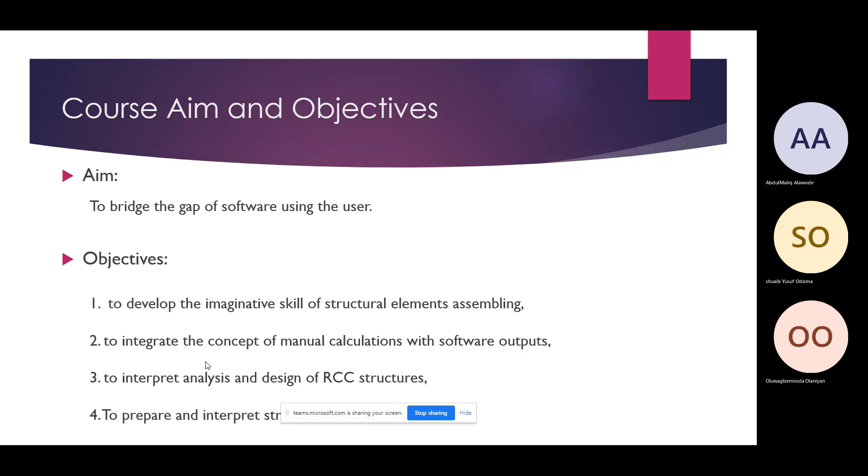So at the tail end of this program, we are going to do slab detail, beam detail, column detail, and if time permits - I'm not sure because of the time we have, we might not be able to touch that aspect - so we are going to treat probably foundation, any of the foundation, be it pad, raft, pile, or pile cap, anyone. It depends on how the thing goes.

So that is the overview of the course. Let's just go through basic things that we all know. What are the requirements when we say we want to do structural design? What are the things that are required? Okay, we check a structural design - how do you know, how do you certify that this structural design is right?

The first thing that you have to consider is the safety. Is this design safe? If you are living there, are you safe? Is your life safe? There is this adage that says safety first is a site slogan - it's known everywhere, safety first. In anything you are doing as per engineering, safety is the first thing.

Then the next thing is serviceability. Okay, this building we are designing to resist, let's say, a retaining wall that is retaining a head - if you put the soil at the back of the wall, is it going to tumble? Is the wall rigid enough, does it have enough resisting overturning moment to overcome the overturning moment being imposed by the head? Is it going to serve the purpose at which it's being designed for? That is the next thing we should consider.

Okay, we have designed this building to be for a cinema. If 100 people should come in, can this building resist the weight of 100 people? So that is what serviceability is talking about.

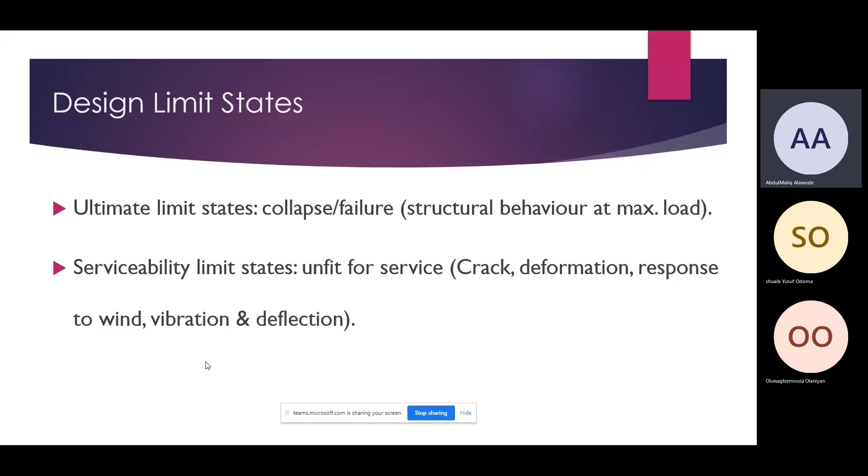These are some of the things that come to play at the serviceability limit state. So at that state, the building is showing failure, but the failure is not total. The building is still existing, but it's already showing that there are some imperfections in certain aspects of the design.

Now let's move on. We have basically three types of load: the dead load, the live load, and the accidental load. We all know all these types of loads. The dead load is the permanent load, the finishing, the block wall, the partition load - all these things are what we regard as our dead load. The fitting, the earth, and the settlement - all these are aspects. The settlement, as if you are designing the foundation, that's where that comes into play. So that is dead load.

Then the live load - we have the temporary load. Those are temporary loads, like human load, like all these building accessories like chair, like bed, like other amenities. Also we have the wind, the snow, the temperature, and the imposed load. All this comes under the subset of live load.

Then we have the accidental load. These accidental loads are short loads, but when they occur, they tend to be significant. Like people that work in the oil and gas industry - there is a tendency of having fire outbreak. A designer should consider fire load when designing a structure that is, okay, oil and gas. Fire accidental load should be considered in that kind of aspect.

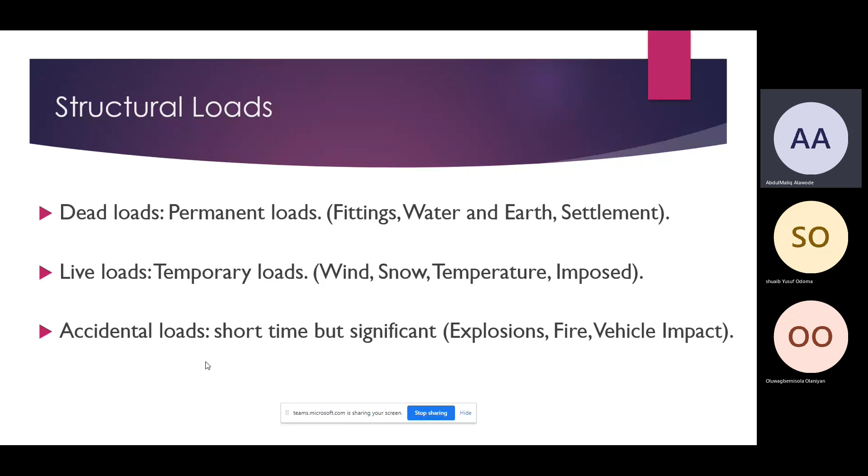Then we have the load combination. When you want to take your ultimate limit state, the ultimate load - that's the ultimate limit state level. Those are the factors of safety you consider when you have your structure exposed to dead and imposed load alone. Use 1.4 and 1.6.

Now, mind you, all these conditions that I've been saying are according to BS code. According to Euro code, it differs - there is a little bit of adjustment in Euro code compared to the BS code. Although both are recognized, the world is tending towards Euro code now, and probably we might review it. But as for this course, we are going to be using BS code because that is what is mostly used - that is still being used in Nigeria currently.

Although there are some companies that are switching into Euro Code currently. But if you go to Europe, to other advanced countries to be precise, they have neglected - some of them have neglected the BS Code to a certain extent in certain areas. They are now using Euro Code.

So in Euro Code, if you have dead load and imposed load, like this 1.4 - in Euro Code it's not 1.4, it's 1.35. For imposed load, in BS Code it's 1.6, but in Euro Code it's 1.5. Euro Code is like an optimized BS code. Let me just say that - an optimized BS code. Some people will say if you tell them okay, I use BS code, they'll say it's not economical.

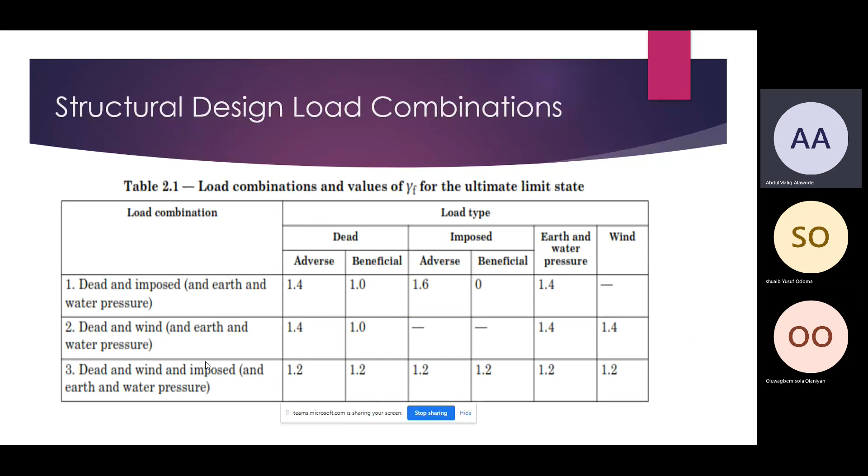As for the loading of buildings, there is a code on that, BS code 6399, if I'm not mistaken. It talks about both dead load and imposed load. In fact, there's another subsection of that code that talks about wind load, how you design wind load for structures that are subjected to it. But because we will be treating a residential building, and that is what is most common, let me stand to be corrected.

Residential, we all know the imposed load is 1.5 if you're considering it as a uniformly distributed load, but as a concentrated load it's 1.4. So you can easily go through that code, BS 6399. It has 3 subsections: one is on load, the second is on wind, and I think the third is on roof and snow loads. That doesn't really apply to Nigeria because I don't think Nigeria has experienced snow or something like that before.

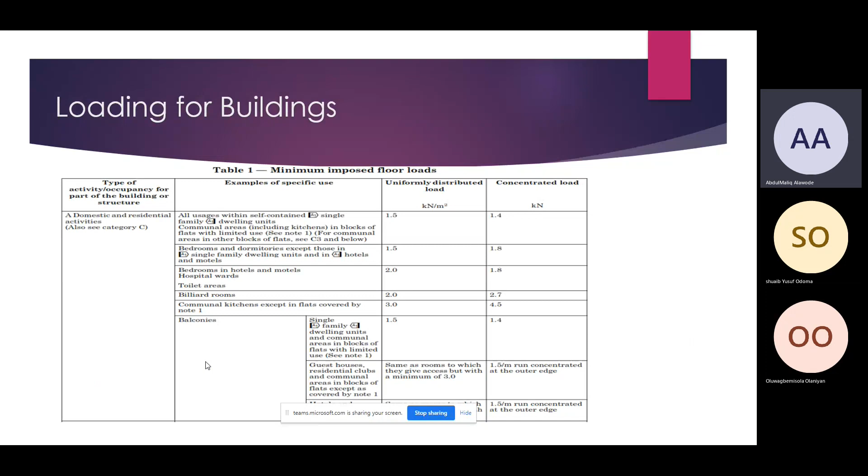I don't know. Okay, design working life. If you design a structure, what's the expected life duration? As I've talked about earlier regarding durability of structure, this building's purpose is residential. How long is it expected to last as constructed without any deformation whatsoever, be it crack or little deflection, without seeing anything?

So a normal building should have a lifespan of 50 years. I think in Lagos now, we are even having buildings less than a year old whose lifespan is already less than a year. Even during construction, we have buildings that are collapsing. So a normal, well-designed and constructed building should last for 50 years.

While monumental buildings, bridges, and other special engineering structures should have a minimum lifespan of 100 years. Bridges, overhead bridges, all these buildings that are subjected to heavy loads should have a minimum working life of 100 years.

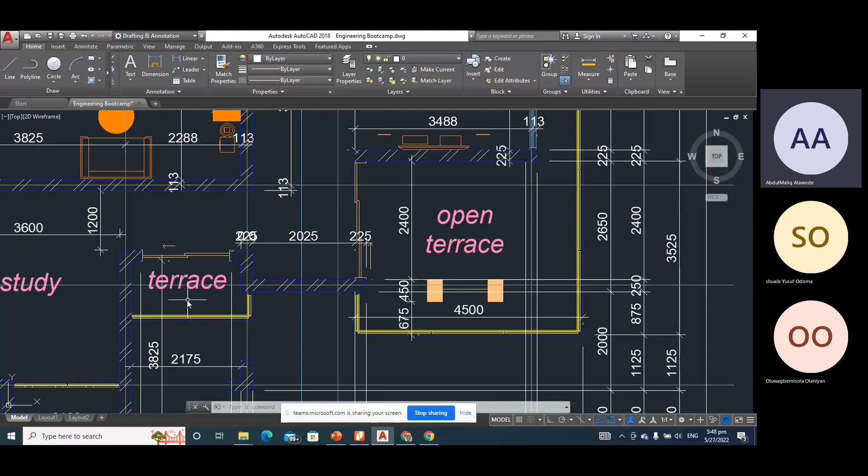Then we have the master bed that has the wardrobe with jacuzzi or whatever they want to put here. Then we have the WC. Then we have the shower. Then we have a study room here. The study room has a terrace very close to it. Then we have another open terrace beside the family lounge. Then we have our staircase that is moving around and a void.

Okay, so we have really studied this building. So majorly the living area, the resting area, they are all on the upper floor, while the amenities area, maybe the cooking, the washing, everything, they have secluded all of them to be on the ground floor. So we have noted that, we've studied that.

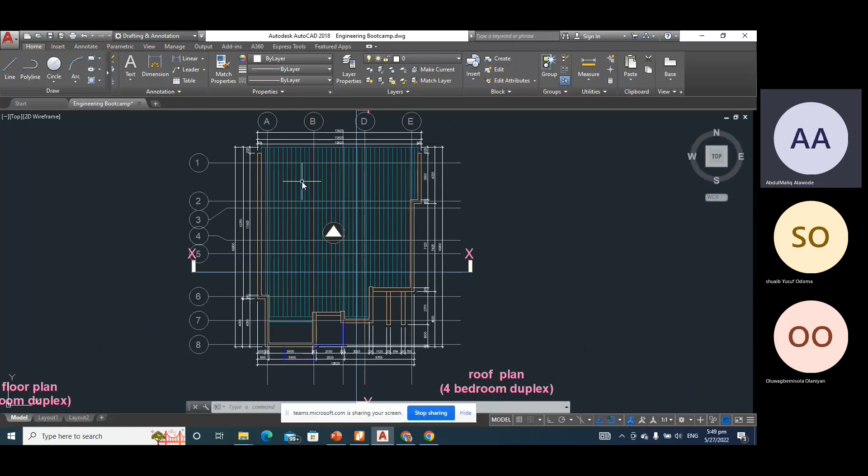Then from this roof plan, you can see that the roof has only one side drain. It's only draining to one side. So that means if you study this roof plan very well, this area has to be higher than this place. This front area has to be higher than this back area.

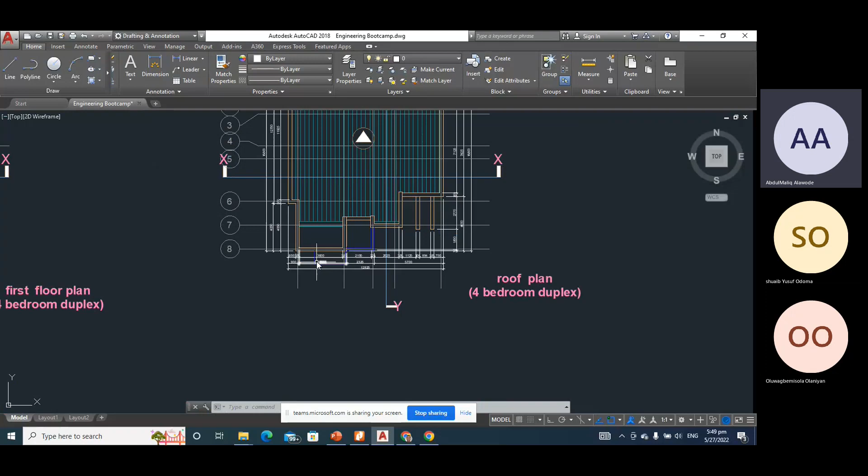What I mean by that is, when they are constructing, before they do their roofing, this area has to probably block, but by the time we check our section, we are going to see that it has to be higher than what we have at the back. Then we check our section to see which section is this. This is section XX. Section XX cuts across this. It goes through the main lounge to the private lounge, and it goes through the window here.

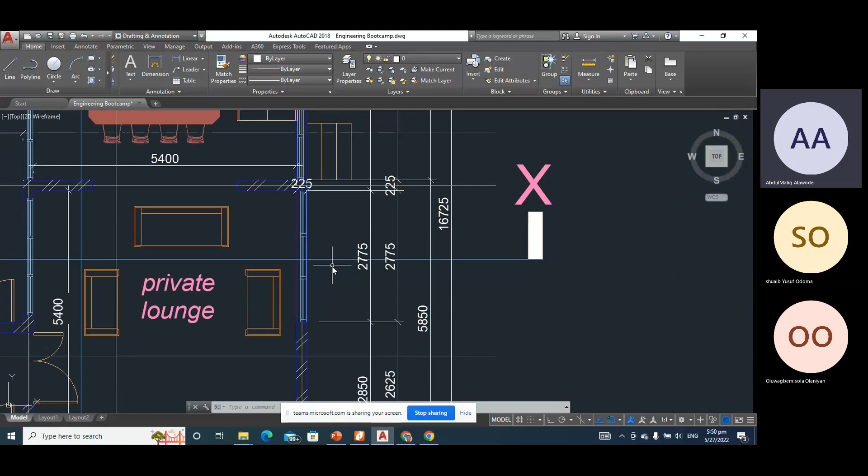So let's see, is that really true on the section? Okay. This is the difference in level I discussed earlier. You can see the building level is higher than the compound level. Then it goes through this first wall, and it goes through another door. Is it a door? Yes, a door, probably a sliding door. Okay, this is a door here.

Then it cuts through, what do we have at this end? This is a window. Okay, is this true? Yeah, it's not close to being true, because it depends. If they like, they can do their window all the way down.

So this is where you now check your window schedule. Okay, what's the name of this window? What's the size? Does it really correspond with what I have in the section? So these are some of the things you have to query the architects on before you start your work.

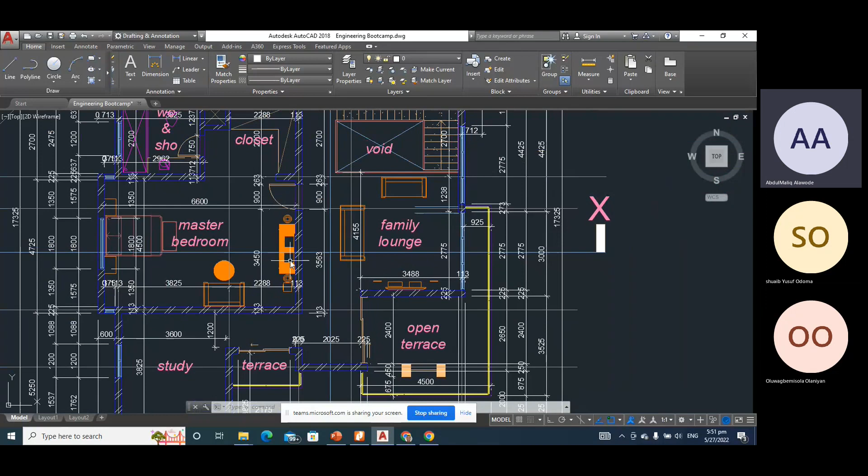So also on the upper floor, what does it cut? It cuts a window that is the master bedroom window. Then it goes to another wall. Then it goes through the family lounge. Then it passes through the open terrace. Is that what we have here? Yes, I think it's almost true. We have window, then wall, then the family lounge, then our terrace here. Okay, that's fine. Then we check the next section, which is YY.

Okay, it goes through window, bedroom, dining. So what I'm trying to say in essence is you check one by one, because these details are very important. If the floors are not working together, you are going to have issues when you start your general arrangement, because the first thing you are going to do as per your general arrangement is superimpose the building.

And when you superimpose, it's like you are bringing the building into reality, because that's what you're going to have in reality. The first floor is going to be on your ground floor, then your roof will be on your first floor. You understand? So that's where the imaginative skill that I mentioned in the objective is going to come from. Because you are going to imagine, okay, the ground floor is here.

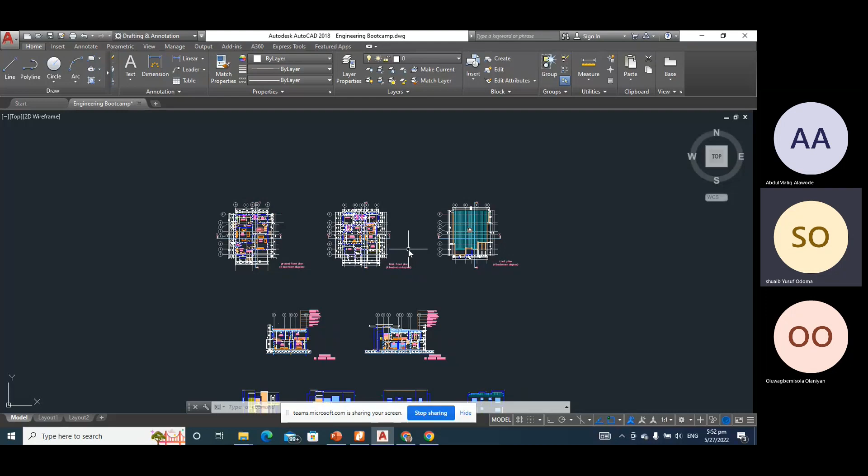How is my first floor going to sit on it? So that is that. Then the second aspect is this section here. You can see what I explained the other time, that the roof is one-side drained. It's draining to the back, and the front is higher than the lower part.

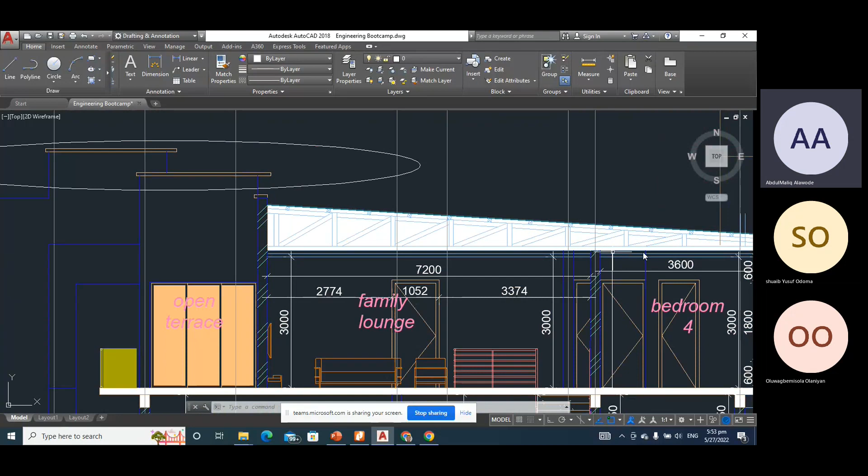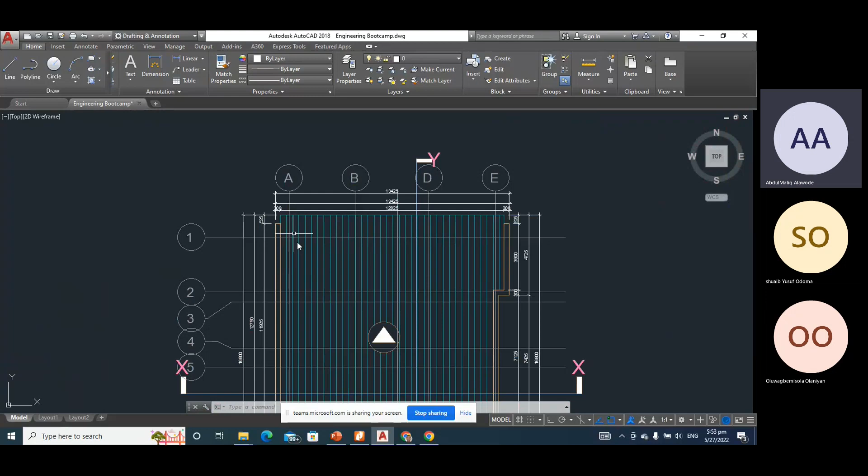In some cases, you might even have the whole roof enclosed. That's what is even trending now. You have your roof totally closed, like you have a wall around it. It has implications, and when we get there, I will explain. Because you can't just leave it, assuming you have a very long roof. You can't just allow your mason to prepare a 7 meters wall without anything serving as lateral support to it. You understand? It's going to give off.

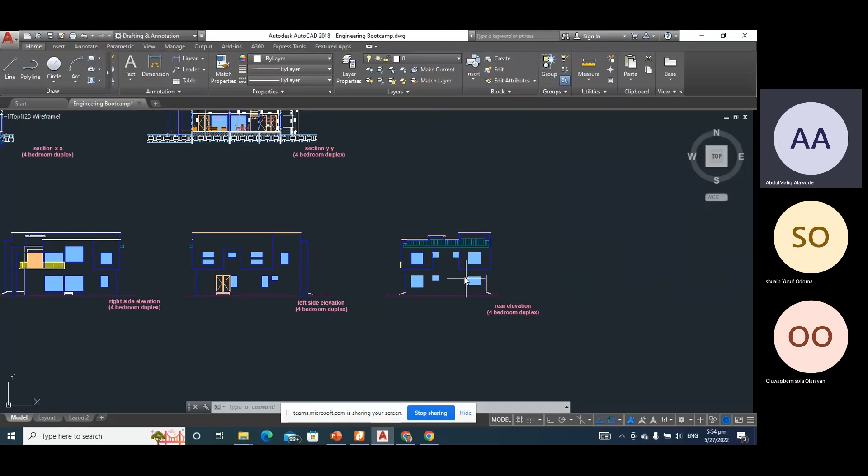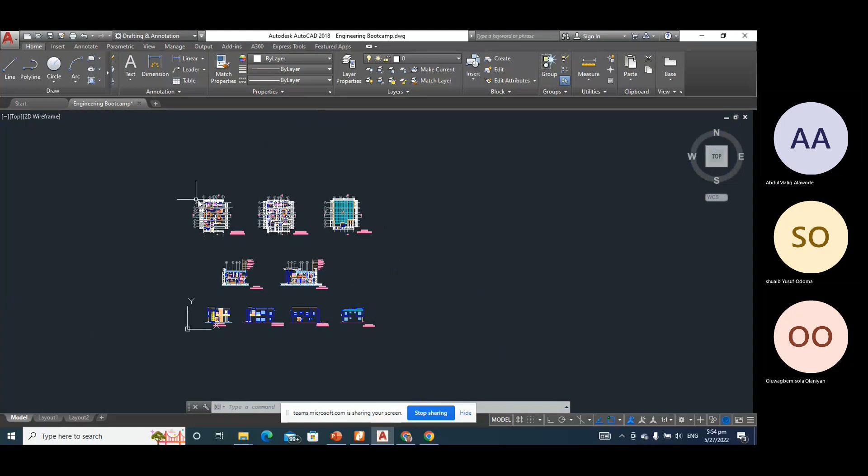Then the next thing is you try and take off the features that are not really interesting as far as structural design is concerned, like the washing basin, this shower, this dining table, this chair, this TV, whatever. They are none of our business. I don't always like deleting files. So what I'll do is copy them to another place so I can work on them and have this as backup in case I want to check any other thing.

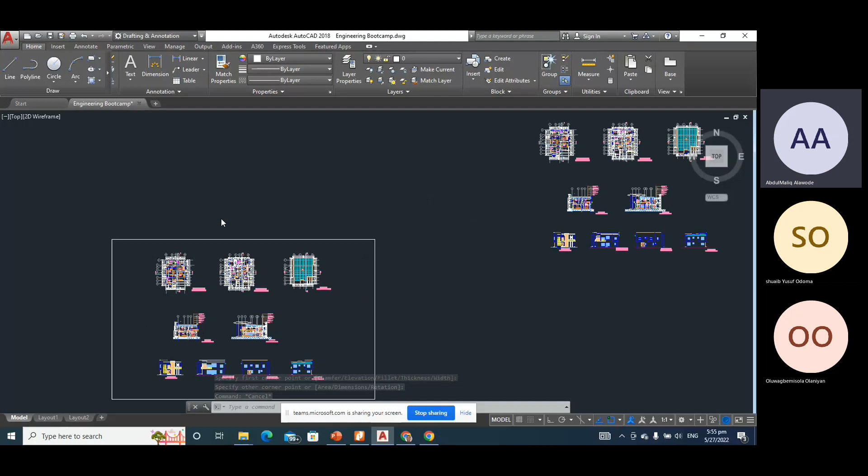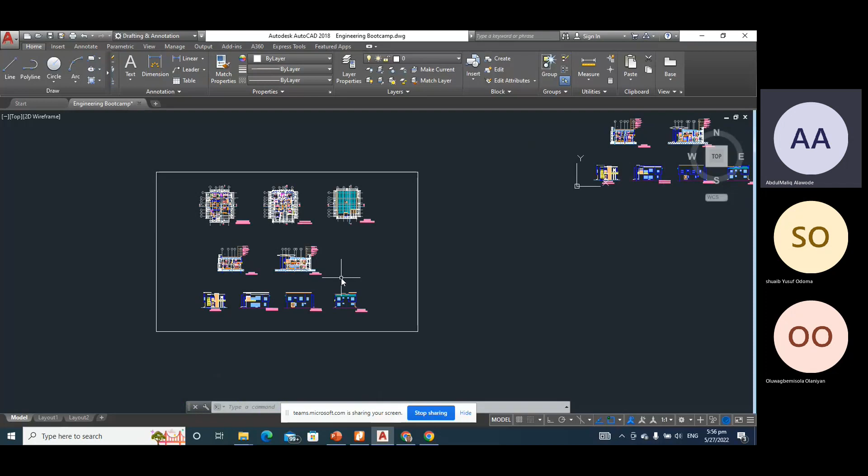Okay, you said you use AutoCAD, right? Yeah, I do. Okay, thank God. What I will do is after the training today, I will send you your own project file. You have your own full architectural drawing, as I have mine. So we are going to replicate whatever we have done today on your own project. You understand? As time goes on, we are going to be doing it like that. So if you have any question, you can always come in because it should be interactive. Do you get the point? Yeah, I do. Okay, thank you.

Okay, now I will isolate this structure. I've taken off that. Then all the features that I don't like, I will take them off: select similar, and delete them. All this kitchen, if the architect has done the right thing, should be on the same layer. I take them off. This one too, I take them off. This, I select similar, take them off. After checking the grid by mere visualizing, you clean up your drawing. What I'm doing now is cleaning up the drawing. All those amenities, features that are not really important, take them off.

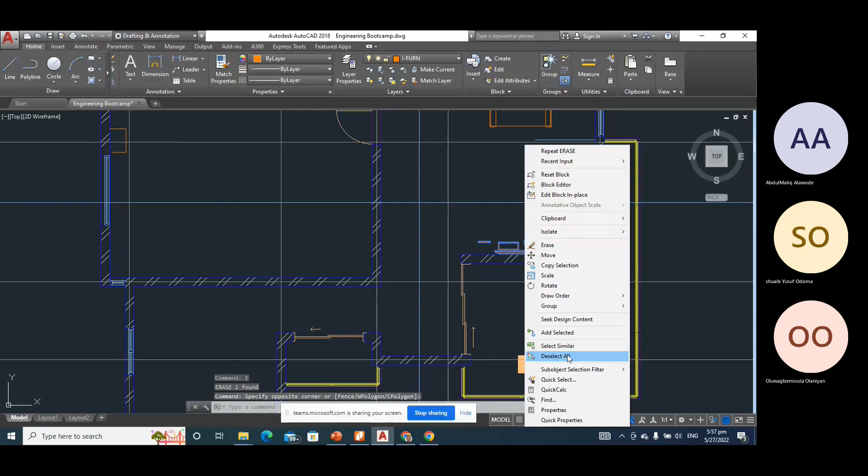Okay. So I think we don't must clean everything, but at least we should have it in the drawing. Select similar, select similar. Okay. To a certain extent, I've cleaned up my drawing now. So we have just wall and door.

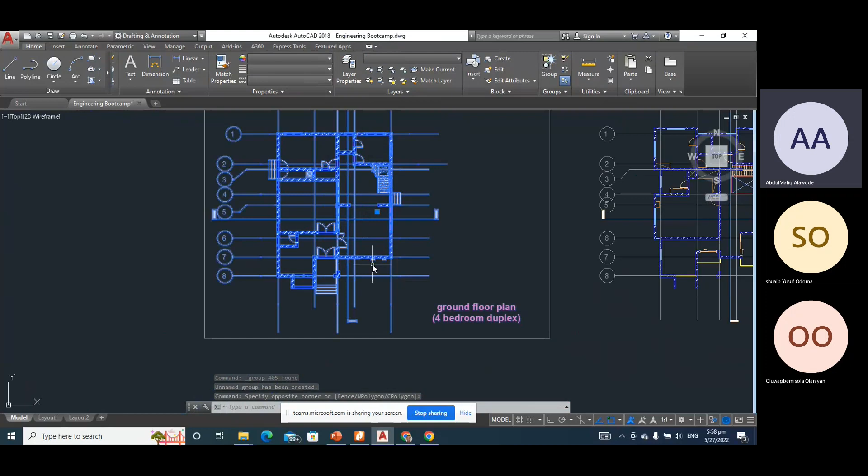Fine. Okay. What I do is this. I'll highlight my ground floor. Then I'll group them. By grouping, that means I've made it a whole. If I select my ground floor, it's going to take the whole features as a single entity. Then I change the color to something like green. If you like, you can change it to blue or any color of your choice. Then I do the same to my first floor too. I group it.

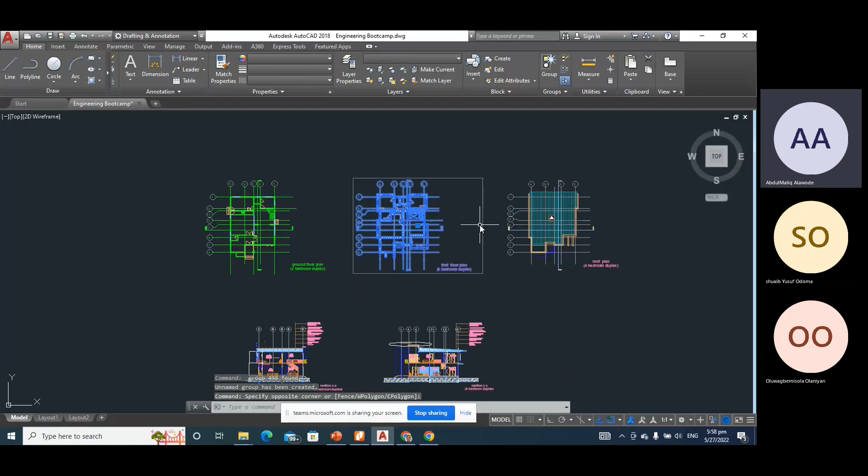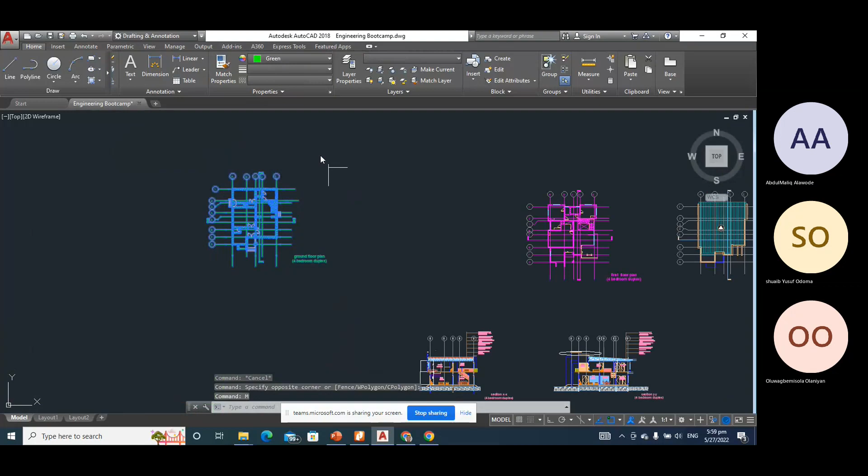Some people prefer to use block, but if you block your drawing, it reduces the working speed of your software. That's why I prefer to group than to block my drawing. So I've grouped this, then let's give it magenta. So in a nutshell, anywhere we see green, that is ground floor, and anywhere we see magenta, we know it is the first floor.

So the next thing is we will find a common point, which is the grid line. As I've said, the grid line is as important as anything. If the grid line is not okay, it's going to give your GA a lot of problems, because you won't be able to merge your drawings together, ground and first, or first and second, any way around you want to do it. You won't be able to match them or superimpose them together.

Some people say, okay, you want to use staircase. What if the staircase is not right? Based on my experience so far, the only feature that I think is far more reliable is the grid line. Aside that, some people say staircase. Staircase works sometimes too, because it's a fixed structure. Then some people use shear wall. That's if you have a high-rise building or a building that has lifts.

So I will use grid line A1, which I believe should be A1 here also.

Are you there? Can you? Yeah, I'm here. I'm here. Okay, thank you.

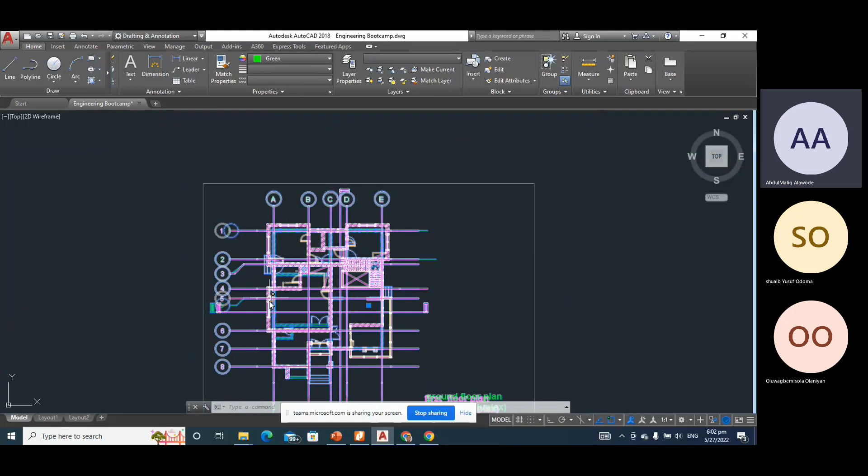E is on E, D is on D, C is on C, B is on B, A is on A. 1 is also like that, 3, 4, 5, 6, 8 are like that. So this building has been perfectly superimposed. So this is how the building will look like. So if you click your green, it has been highlighted. Your green is telling you, okay, this is the boundary. You can see the boundary of your ground floor. The ground floor starts here, it goes like this, goes like this.

So we have cantilever here. Definitely we are going to have cantilever because your first floor surface area here has extended beyond the boundary of your ground floor. You understand my point? So we are going to have cantilever here, here, here, and here. We are going to have cantilever here too, because this open terrace is on the first floor. Also, we are going to have cantilever here.

So how do we now start? If you want to start your GA after doing your superimposition, you have superimposed your ground on your first, and if it is a structure that is more than a floor, let's say a 10 or 20-story building, how do you do it? You take your first on second, your equivalent GA, you take it to your second, then you superimpose it on your second.

You can hear my voice? I'm hearing your voice.

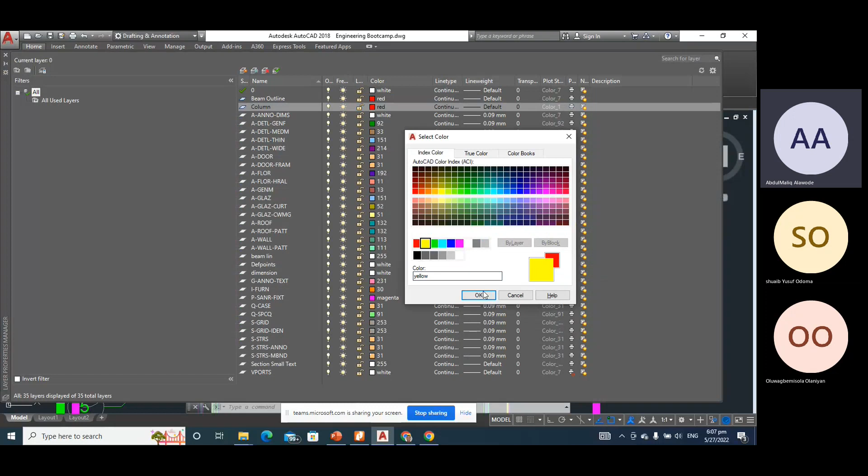So let's select this as our current layer and turn it off. So my layer now, the layer I'm using now is beam outline. And the reason why I like creating layers is for ease, probably I want to do editing on beam alone. It's very important to create your layer so you can distinguish your structural elements.

Probably you want to do something on certain elements, you can just easily select one and select similar and replicate for all. Or you want to take them off temporarily or permanently, or you want to do editing. It's a proper way of working.

So now let's start. This is our first floor. Our first floor is magenta. Our ground floor is green. So PL, I always prefer to use polyline. I take the outer part, I draw it. Where is the limit of my ground floor? Okay, this is the limit of my ground floor. I stop it there.

Now, when it comes to sizing, it is also experience. More often than not, you size your beam based on your block wall, and generally you have 225 as the size of block walls. But me, I don't like using 225. The 5 mm definitely on the side will later collapse. So I take it to 230.

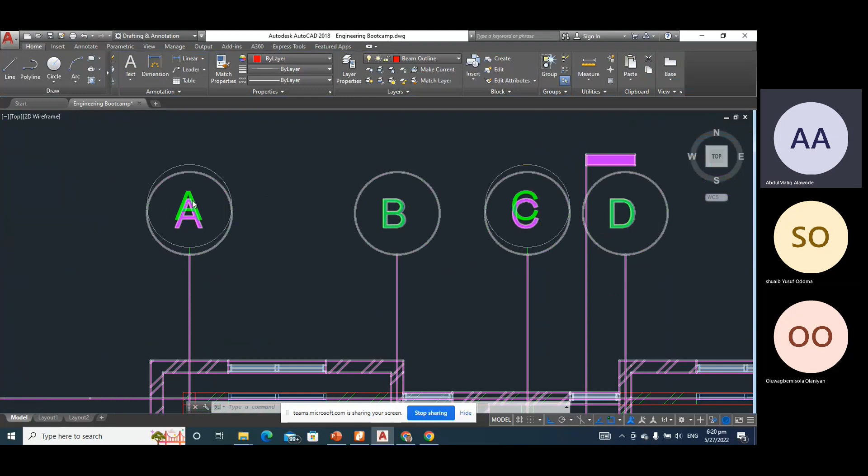So that means if we are going to have any support for this beam, it must not be at this point. It has to be a little bit closer to grid line A. You understand my point? So that's the first thing that we can deduce from having 6.225 here. So let's check grid line C to E. Grid line C to E is telling us 5.625.

So we can easily work around this: if I'm going to introduce a column around this area and shift it a bit, this one will still be within C to E, within the allowable range for a 450 deep beam, while this one will also be within the acceptable range for a 250 by 450 beam. Sorry. All right. So that's that on that. Let's continue.

I want to take another length of beam because we have not started drawing columns. We are just drawing beams currently. Let me check, where is the end point of my ground floor? Okay, my ground floor ends here, so my beam should terminate here. Let me draw another beam here and assume it terminates here. Let me see my green. Okay, my green goes like this.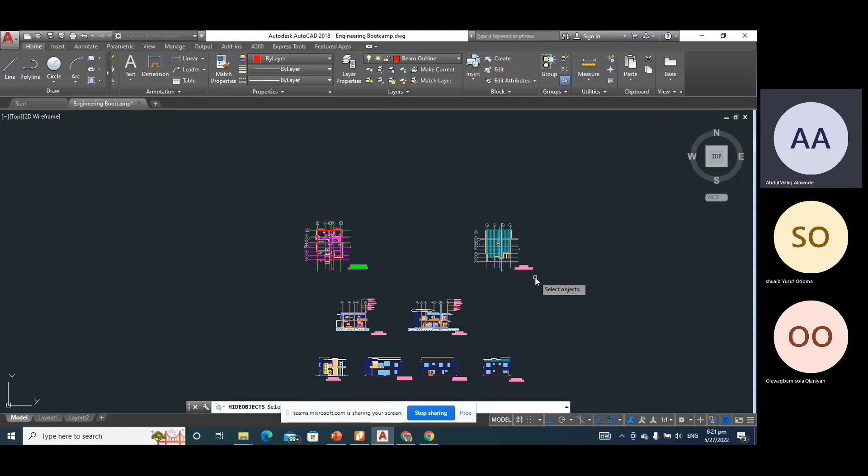But what is it supporting? That is our first floor. We check the limit of the first floor too. Does the first floor extend to this place too? Yes. Okay, you are not seeing it very well. That's when you call back what you have hidden earlier, the original architectural drawing. I called it back. So I have it back.

I'll check to confirm. Okay, it shoots out here. It also shoots out here. So that means there should be a slab around this place. So we go back to our layout. Here, draw a beam. I offset it to 30. No. Offset to 30.

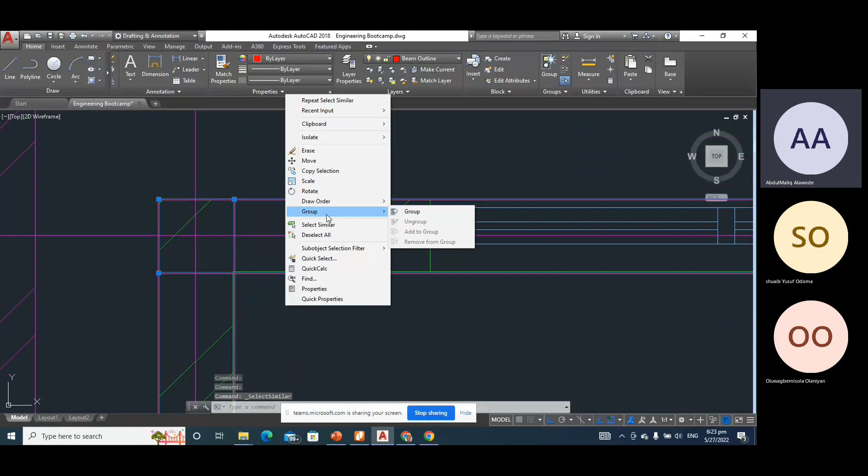There's another one here. Okay. I wouldn't want to draw. There's something I want to do here. I can make this a cantilever. I take an offset here. Where's the end of my ground floor? Okay, my ground floor ends here, so I can easily trim this off. So far so good. What have we done so far? Let me take this, select similar objects, and bring them to the front.

Okay, how many beams have I drawn so far? I've drawn this beam here all the way, but I would like to trim this. There is something I will explain on this later. Okay. I've not offset this. Let me take and offset this. Let's see.

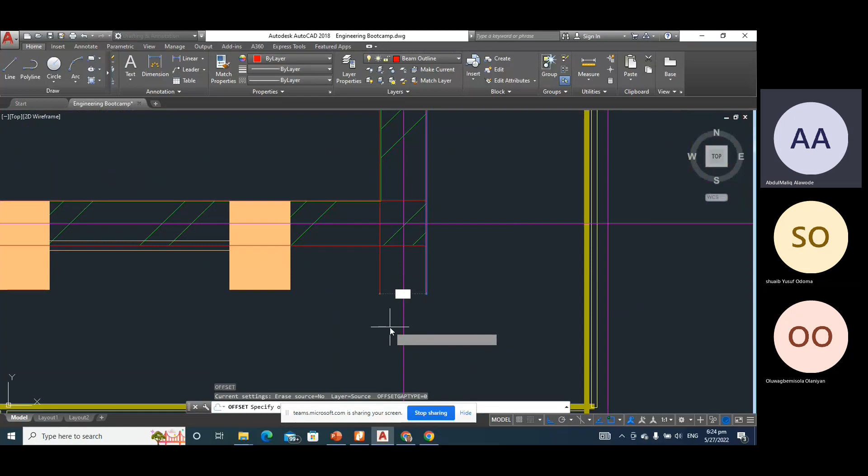Okay. So what I'm drawing first are my perimeter beams. Offset. Select this. Take an offset again, 230. Let's offset, then trim. All right. So we have drawn all our perimeter beams.

Okay, we have drawn all our perimeter beams. So let's now walk inside, walk into the building. Where do we have block wall? Where can we introduce a beam?

If I introduce a beam here that goes all the way, this beam will be very good, because we have block wall on the ground floor that goes virtually from here. We have a door here. Before your door, above it, you have a lintel. You understand? So definitely we have a beam that goes through this place.

It's still going to be flush with the block wall that will be mounted on top of the lintel. So there is no issue passing our beam all over up to this place. So I can draw one very nice beam.

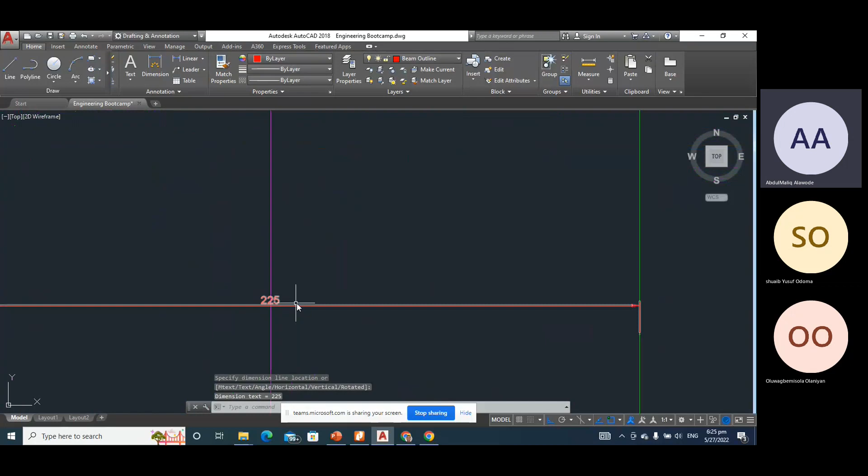And draw one very nice beam from here. But check this beam, this block wall is likely going to be 150 because it's a partition block wall. Okay, it's 225, good. So I take PL from here, from this grid line, 115. So this 115 gives me, and I take it all the way down.

Then from here, I take an offset, 230. So I close this to meet with the other beam, to meet with this beam.

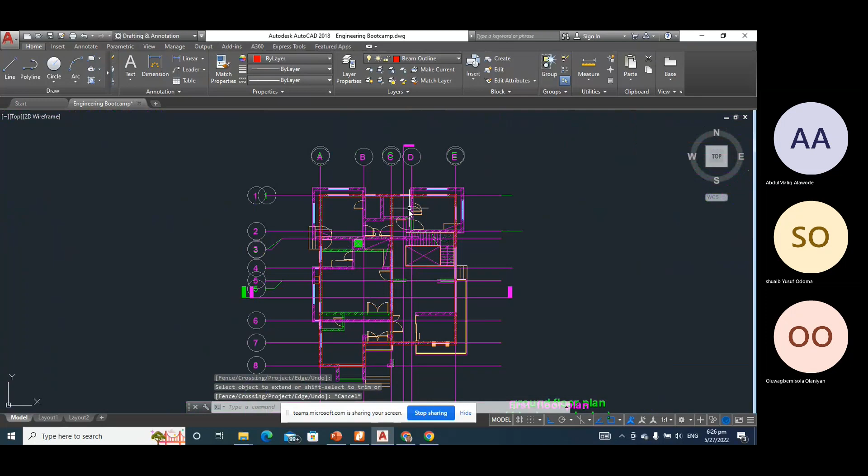How many beams have we drawn so far? We've drawn the perimeter beams, right? And all the perimeter beams are flushing with the green. And mind you, our green is the ground floor, right? Okay good, so we've divided this whole building now into two, we have this portion and we have this portion.

We can have an engineer who thinks, okay, this building, I'm done with the GA. That's one engineer, I'm just saying. Let me move this guy away by let's say 50,000. I've moved, this is what we have done so far.

This is the GA we've created so far. An engineer can say, oh, what a very nice slab, I've created my slab, we just say from here to here. You know, we have two types of slabs: we have one-way slab and two-way slab.

This is 5.623 meters, and the other length is 13.23. Wow, this is a very nice one-way slab.

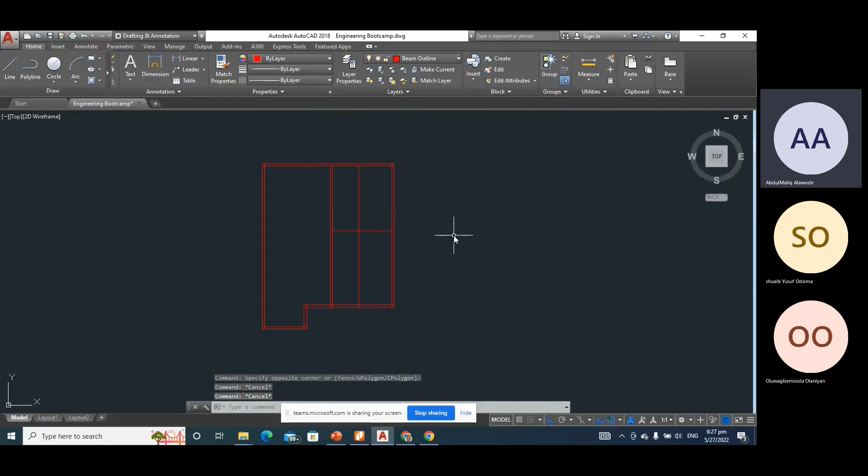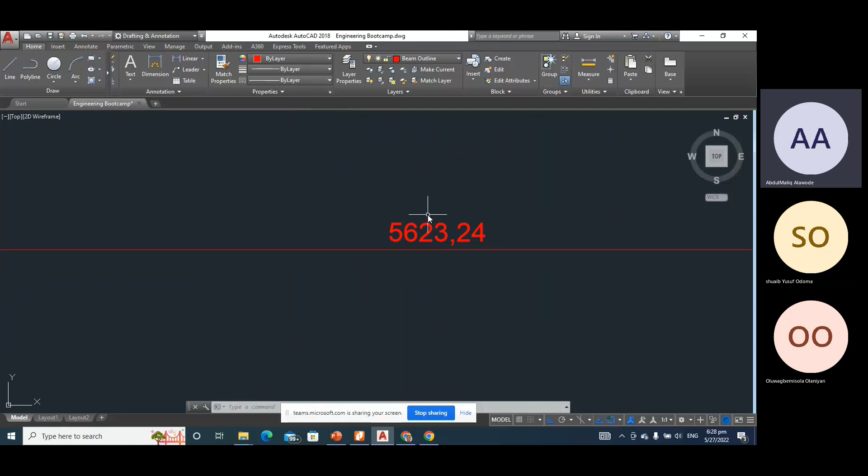So I'll just leave my GA like this. This is not economical. It's allowed, to be candid it's allowed, because I think this can pass. This is 5.623, the LX of your one-way slab. With a 150mm slab, this will pass, but it's not economical.

The reason being that if you decompose the load of this slab and distribute it on this beam, the depth of the beam that will resist the load coming from this slab will be much, unless we have columns sufficient enough to bridge this layout, pardon, to bridge this beam. Do you get my point? Into span, to have a continuous beam.

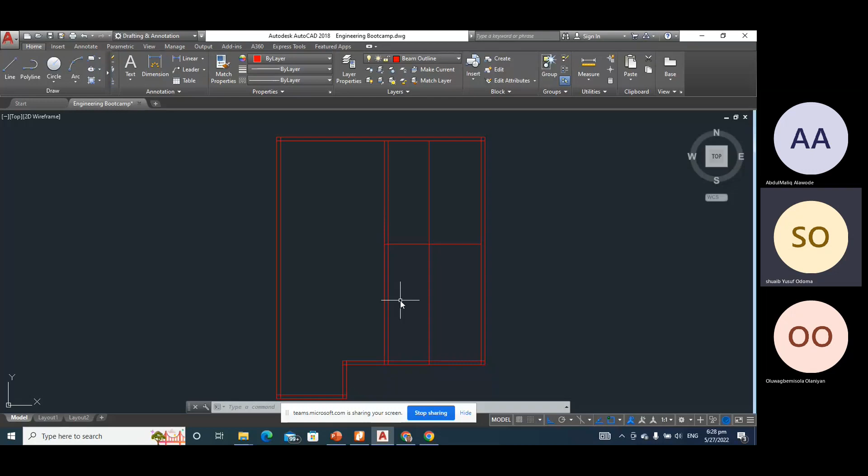Unless you have that, but generally this layout is not economical. So we have not finished our work. So we take this back, I think I took it off by 50 meters, I take it back so it's back on. So we continue our journey.

So we check again, which other block work can I use? Okay, if I draw a line here, if I draw a beam here, does it make sense?

Yes, it makes sense. In fact, it's going to work with this block wall on the first floor, because as I'm touching the gray, the magenta color is telling me that on top, on this same grid line 3, there is another block wall corresponding to this grid line on the ground floor, and the wall is flushing. So having a beam here is another thing we should be thinking of. Let's try and create another beam here.

Where is the wall? I always ensure that my beam is at the center. The center of my beam is flush with the center of the block wall. So if the beam will be bigger than the block wall, it's going to be of the same offset on both sides.

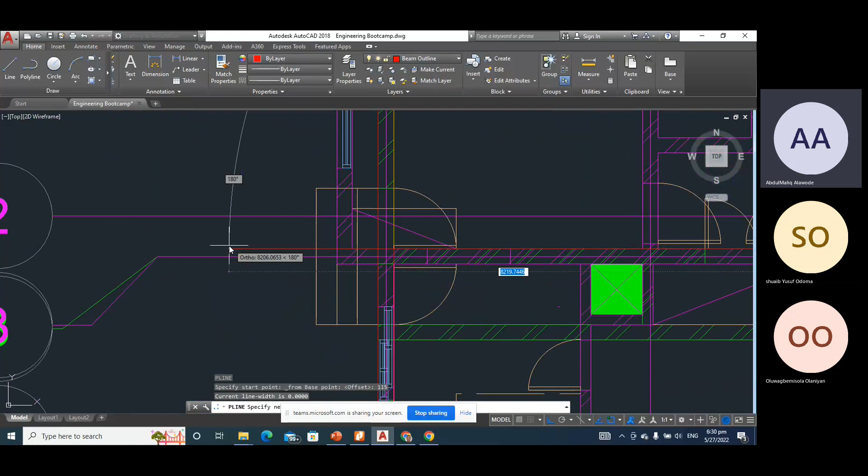Here, take an offset from here, 115. Okay, draw it. Take an offset, 30. Right.

Extend it to this beam. Okay, that's fine. That's extended.

Moreover, if you check this first floor, you can see that this beam, can you see my cursor? If we are going to plant anything inside this wall on the ground floor, it will not go beyond the ground floor. Why? Because on the first floor, this wall is beneath the slab. It's not directly on, it's not flushing with the first floor block wall. So anything that we are going to have, be it column, if we are going to have any column along this block wall, is going to terminate on the ground floor.

It cannot extend. So in a nutshell, this beam that we are going to introduce, it is best that we extend it to go beyond this end, beyond the first beam that we have drawn, because later you can plant a column on it to support the roof, or perhaps we have other floors above. I'm just assuming, if this architectural drawing is not one floor, it's probably two floors. So it's advisable you extend your beam to have like a cantilever beam to the boundary of your first floor.

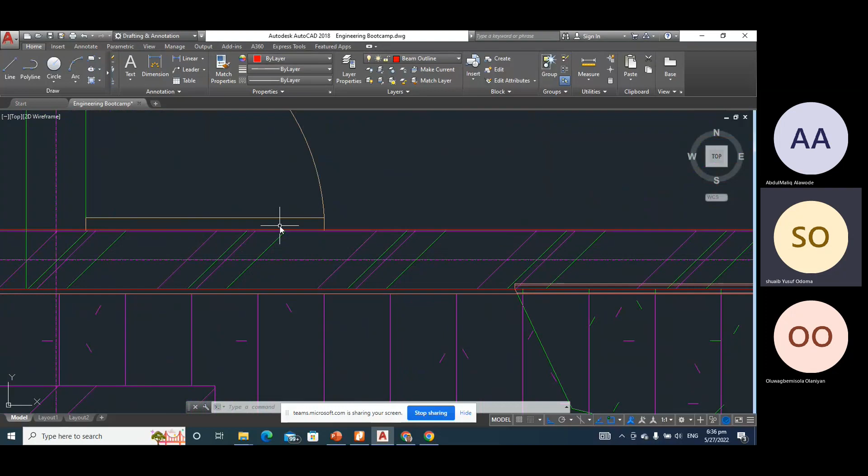Thank you for that question. Thank you, that shows you are following.

Okay, we've created another floor here, another panel of slab here. Let's see what does that slab looks like. It starts here, goes all the way like this, goes all the way like this, goes all the way like this. Okay, we're almost done with this part.

Okay, but this beam is going to be showing on the ground floor. Do you get what I'm saying here? Because there is no block wall here. What are we going to do? We leave it like that. Because obviously you can't have 100%, what's it called?

It's not every time you give your architect preference, there are some cases. This case, you don't consider whether there is a block wall or not. This beam that you have drawn, you need to support it. And I want to use this beam that I've drawn here to support this beam that I've drawn here. I don't know if you understand what I've said.

Hello, are you there? I didn't really get the idea of using the other beam to support the one you drew down. Okay, there are varieties of ways of creating a supporting system for beams in a layout. Either you use a column to support a beam, or you use a beam to support another beam. The beam that is supporting another beam will be a primary beam, while the supported beam will be a secondary beam.

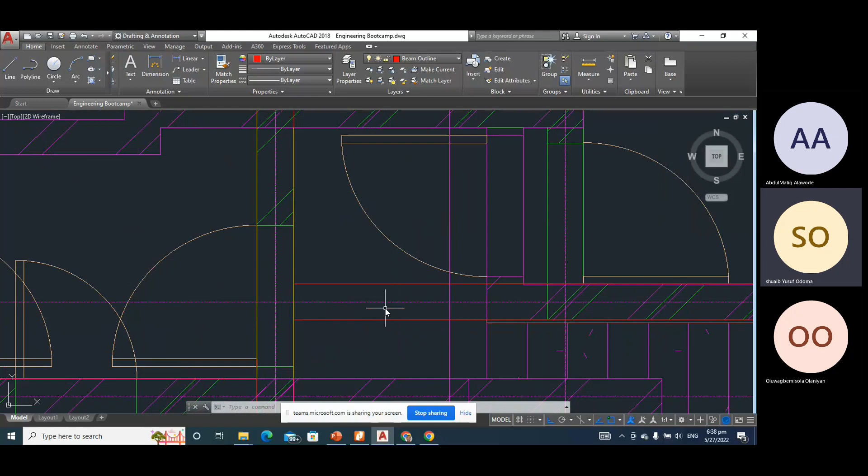So when the iron benders are working, these are some of the things you check as a designer. Are they not putting the reinforcement of this beam on top of this reinforcement? That means they have changed the support system. Do you understand? That means they are making this beam a cantilever now, and they are making this beam to have unnecessary support.

You understand my point? That means this beam will not be stable again. So that's what I'm talking about. So we have primary beam and secondary beam. It's not every time you introduce a column to support a beam, you can introduce another beam to support another beam. Okay, yeah, so that is that.

We are done with this one. Then let me complete this upper face. Let me just complete this upper face. Okay, what can we do here?

What can we do? Mind you, this magenta line that I've highlighted, it is on it that our roof is going to sit on. So definitely we have to have, probably at each of the edges or very close to the edges, columns that will go up to support the roof beam also.

In that regard, I will prefer to extend either this beam that I've highlighted, or this beam. If it is this beam that I'm picking, I will extend it to protrude out to meet this point. If it is this guy that I'm choosing, I will extend it to hit this guy. Hello, are you following? Yeah, I'm following. Okay, thank you. So I will extend it to hit this guy, so we can have like a cantilever beam, and it's going to show on the ground floor.

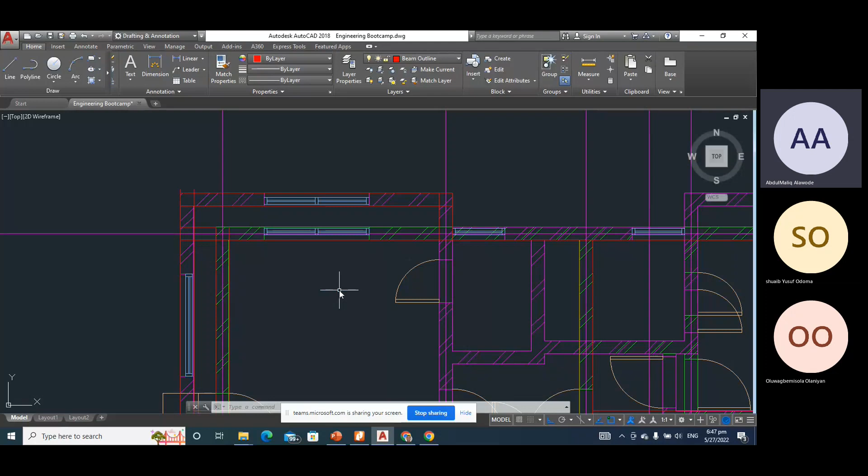Because someone will just be thinking, please don't be like some people. There are some engineers that plant columns on slabs. Well, it's not ideal. There is a high tendency of punching in that area. And I'm sure they don't design those slabs or provide punching reinforcement for them. It is very, very dangerous. So I will advise that if we are going to have a column at the end, and you are seeing it as sitting on the slab, please don't see it as that. See it as: I need to provide a beam to carry it. You understand my point? Yes.

Now, I've created a short beam here. My mind is telling me that this short beam is a cantilever beam, but why can't I make it a continuous beam? So it's going to be a two-span beam. This beam.

This beam that I've highlighted, I can actually have it as a continuous beam. So in that regard, I'll have something like this, and also have something like this.

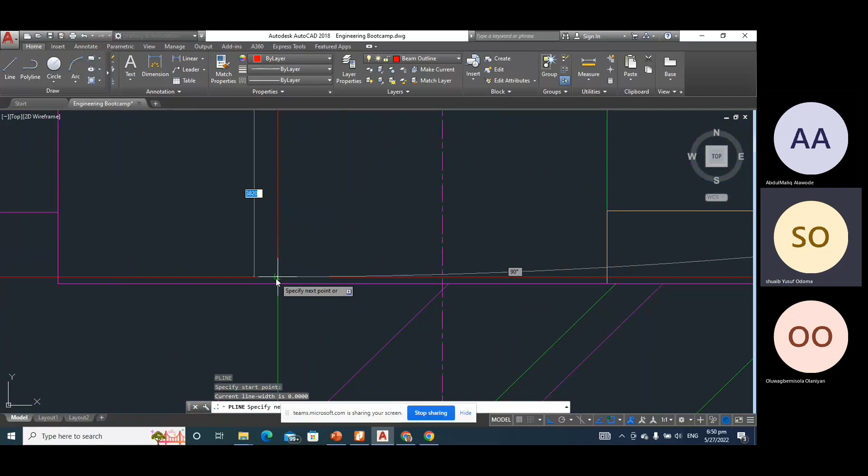Offset. We take an offset, 30. Are you with me? Yeah. Okay, thank you. So I think this one is looking like a box, unlike the case we have here. Or am I the one? This is also rectangular. Let's confirm. This is 3 points. This is 4.2, 4.42. This is 3 points. Okay. This side is longer than this, it's rectangular. So which one are we going to give preference, from what we have done at that other side? The longer side.

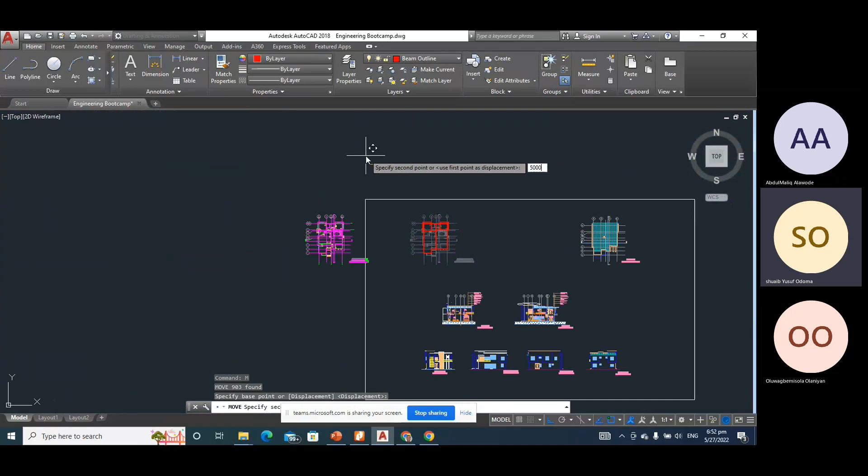Thank you for that. So we are going to extend this beam too. So if we extend this beam, that means we are going to create another beam here. Pick up the one we want to make a simply supported beam. Offset 30, 30. Line. An offset 30. Now I can say we've done a reasonable job here. Is it reasonable? Let's check. Let's take this off, like 5,000 meters. Wow. See what we have created.

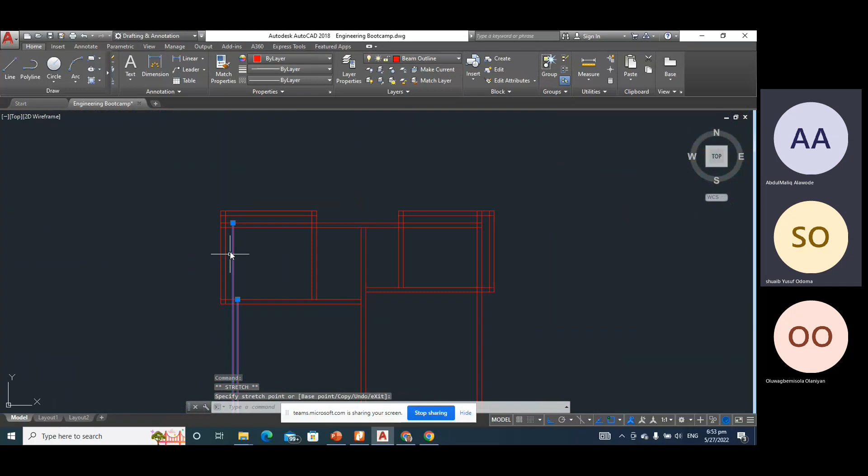Now, as I'm seeing it, I don't know if you're also seeing it like that, I'm thinking we can pick up this beam. That particular one? Yes. We are over reinforcing that area then. Yes. We can actually rip off this place and have something like this. But it all depends on if we are going to have something from that extension upward anyway. Let me bring back the layout. You can see it's a very easy touch on site. We will place a slab, they will just build their block wall to hit the slab here, on the ground floor, and it stops there. Then we have our first floor shooting out.

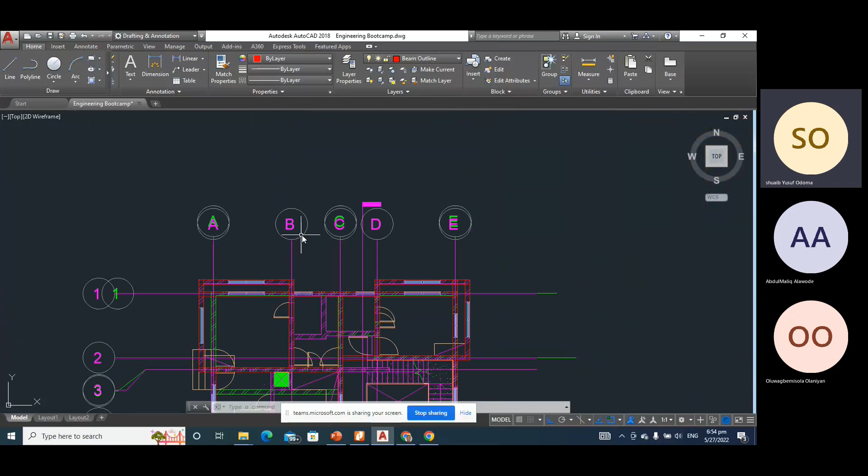You understand my point? Yes, that beam is not important. So that's what GA is all about. An engineer can decide to retain it. You don't have to question it. But that design will not be economical. Because just imagine the cost of constructing this beam from here to here. The additional concrete that will be added to the slab, the reinforcement, the workmanship, the time, the formwork, everything. Here also, I think we can do the same thing. This place also is looking like the same. But can we remove this beam?

That one entirely. Yes. No, you know, we reduce this beam, yes, that section in that. This one? You mean this one? Who made that one the primary? That one is the primary beam, I believe. Thank you very much. You dare not remove this, because the primary beam is the one supporting this beam. That's what I want to hear. You dare not remove it.

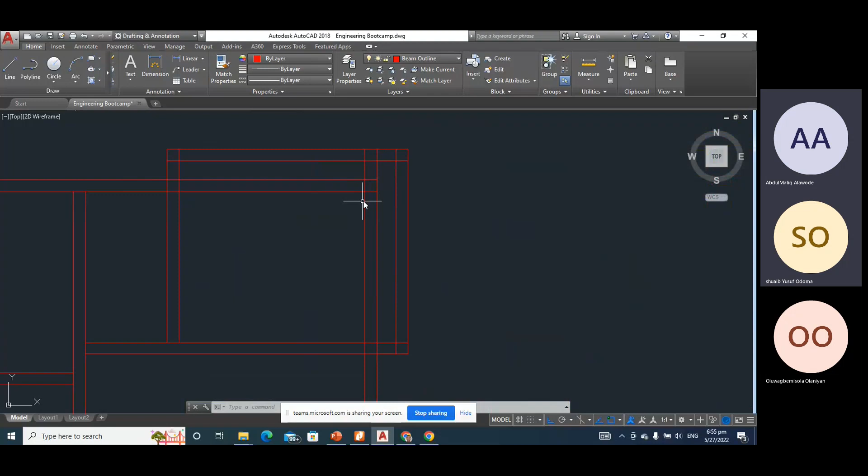So that's the same thing we are going to do here. So which one are we going to reduce here now? Is it the horizontal beam or the vertical beam? Which one? Vertical. No, it's not the vertical. The vertical is the primary. This is the vertical, because it's also extending downward. Exactly. So we are going to reduce this.

You know, we have columns there. What if I plant my column on this beam here? I'll plant one here and plant the other one here. It's going to be stable. This beam has nothing to do with the column. In fact, it's going to be additional point load on this cantilever beam. I don't know if you understand what I'm saying. Do you get my point?

Yeah. Okay. That particular section is even at the first floor. Yes. This is the first floor. Load is from the ground floor there. Exactly. So, but I, as a person, I would prefer to retain it. You know why? Aesthetically, seeing a beam shooting out, another beam shooting out, then we now see a slab. Then it now looks like an inverted U. I always like to enclose. It's like finishing your work.

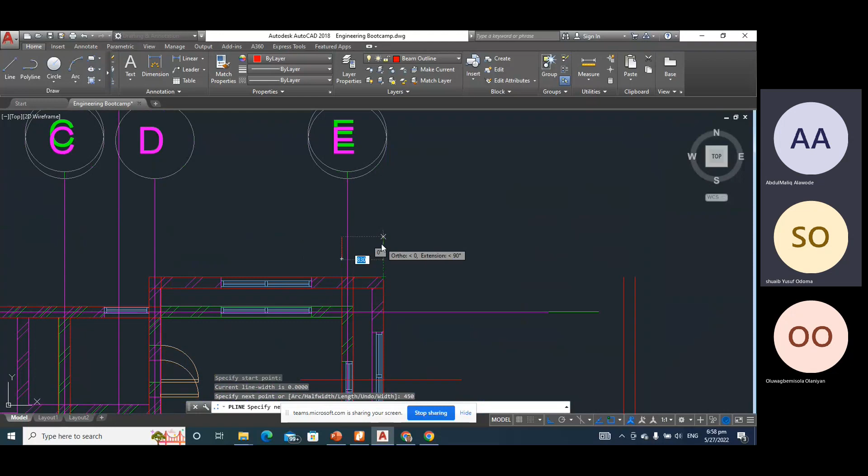Okay. If I draw just a line here, and it stops here, you know, this will be a slab. If I cut my section like this, what am I going to see? 450 beam, 450 beam. Then this length. Let me draw it from here. 450 beam. Then it stops here. Then 150. This is what I'm going to have if I cut a section. Are you following me?

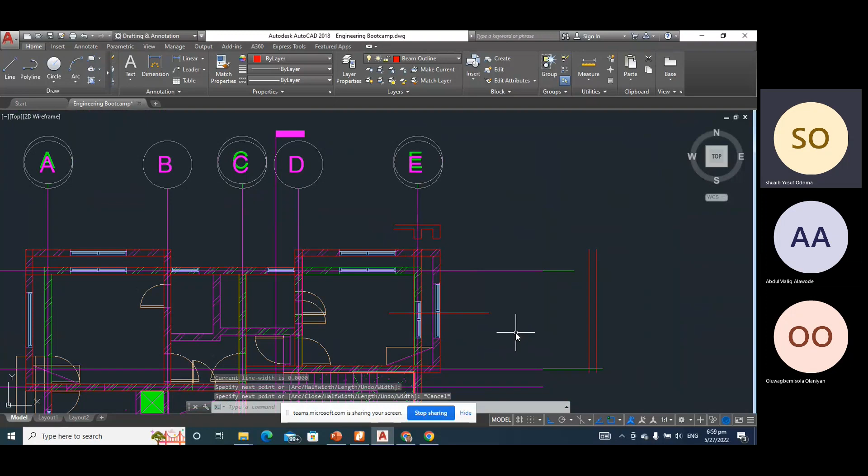But if I'm going to introduce this beam here, I will not have just an ordinary slab here. What I'll be having here is going to be a beam rather. Offset 230. This is what I'm going to have there, which will look nice. So if I'm standing here after the completion of the project, I will not be seeing one ambiguous shape.

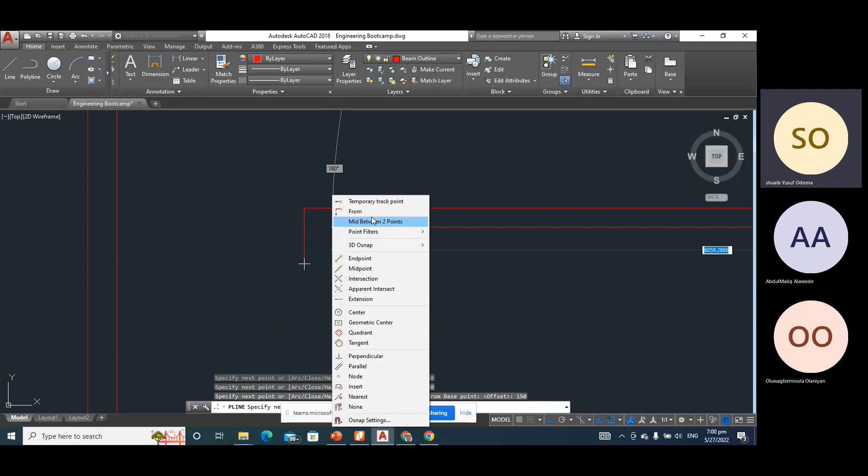If I'm standing here, where my line is, and I'm looking directly in this direction, towards this place, what I'm going to see is going to be something like this. 450. Let's assume the length of this slab is up to this. I hate this shape. I'm so sorry to say.

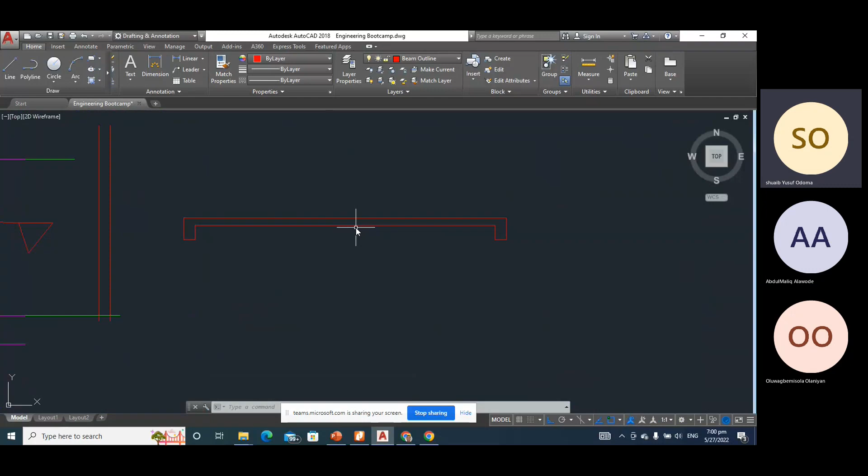I don't like it. Is it not like referring to an overhanging beam situation, like when the projection is overhanging? No. That's what I'm saying. Let me say, where is the side view? Where is this view? It's here. Okay, open terrace. We have open terrace at the top. I think it should be this place. This is the place I'm talking about.

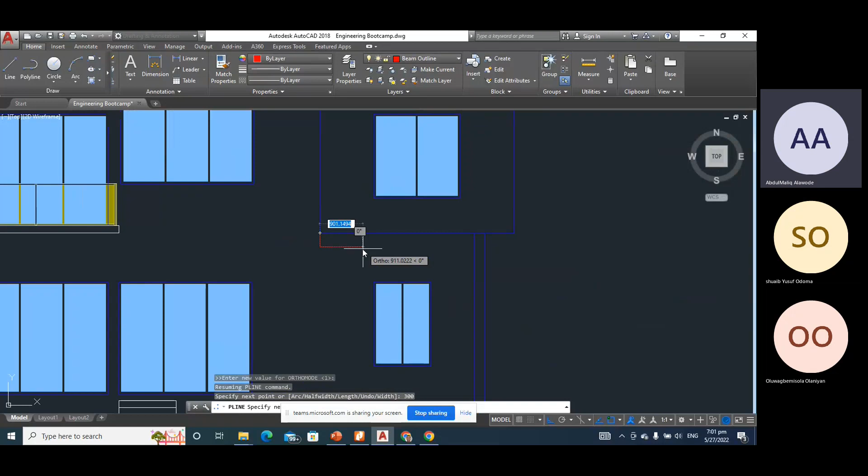You can see this is where we have the cantilever we are talking about. You know what we are going to have here? If we do it like that, we are going to have this one offset 225. Then we are going to have the other beam here, dropped by 300, because that will be the base of the slab. Then we have 230. This one also.

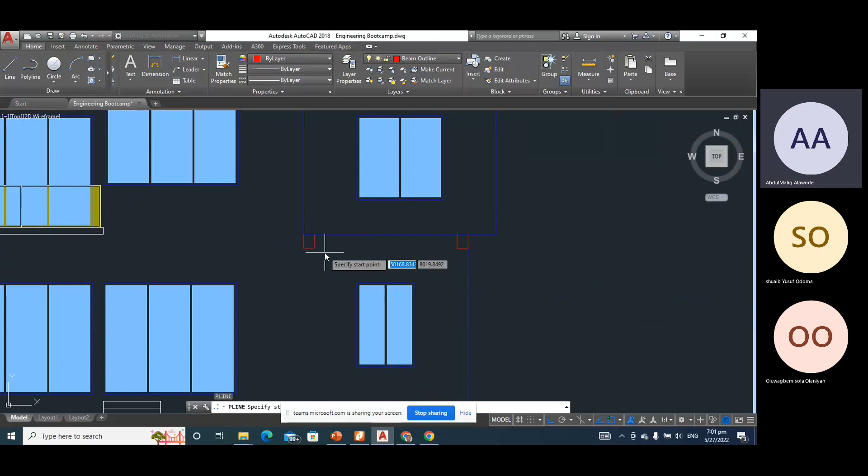This is what we are going to have. You understand? But if I have a beam that is closing this thing up, I won't be having something. I will just have something like this. I'm coming over. Okay, let me. We just have like an extension of this, if this one has been extended down.

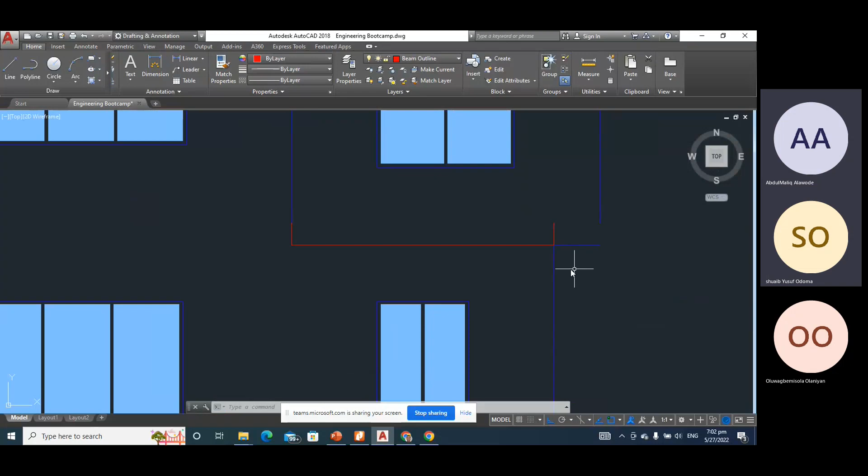You understand my point? Yes. So everything just looks aesthetically pleasing. You understand my point? There are a lot of buildings that people do like that, but I don't know. The engineer, even if it is just a 230 or 150 beam, just put it here to have a better finish at that place. You understand my point now? Do you understand my illustration now?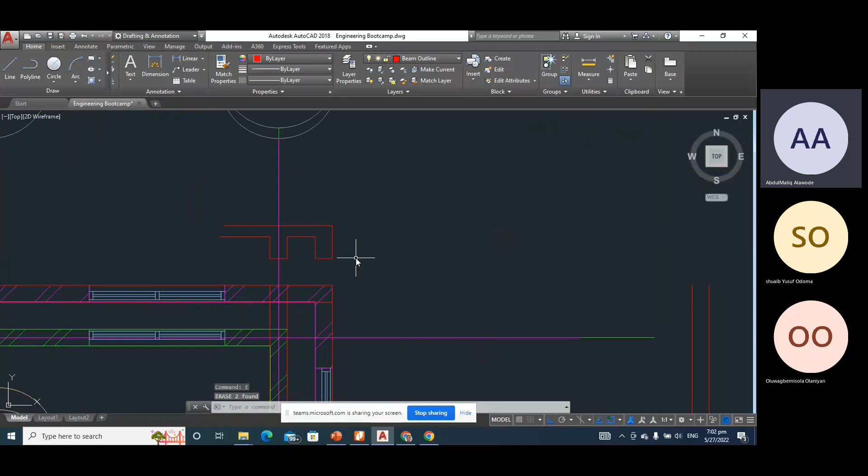Yeah, thank you. Okay, so on that note, I will keep my beam 5,000. Please pardon me. I took 10 minutes the other time. I will take my 10 minutes back. I'm sorry. No problem. Please pardon me for that.

So if you like, you can say, okay, I will retain this as 230. And if you like, you can retain it as 150. It's not a problem. Since it's not doing anything so serious, it's just to protect the aesthetics there. You understand my point? And the column you are going to plant is not going to be reacting on it. It's going to be reacting on the one that is coming out to pick the beam itself. You understand my point?

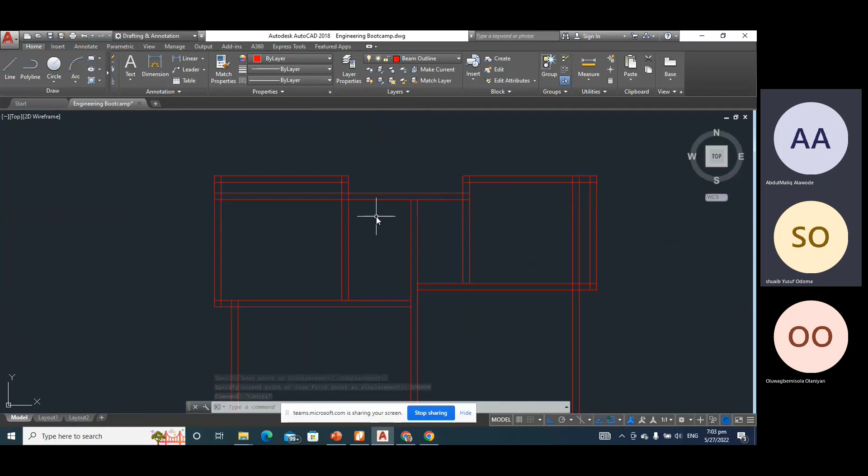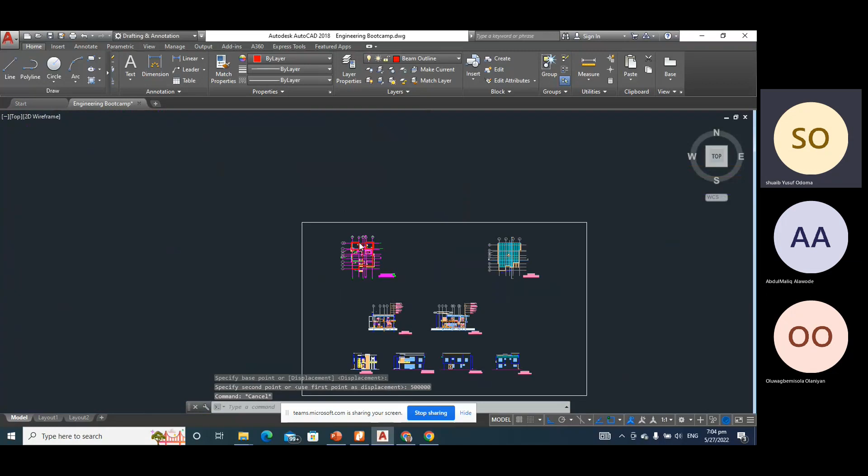So far, what have we done? Let's see what we have done. 5,000, 50,000 rather. Okay, we have not introduced any column, but at least we know where we are going to put columns. They are already showing up. Our slabs are coming up. We know we have slab here. We have slab, we have slab, we have cantilever, then the lower part. 50,000 is much. Okay, so we are done with that aspect. With that side, we are done.

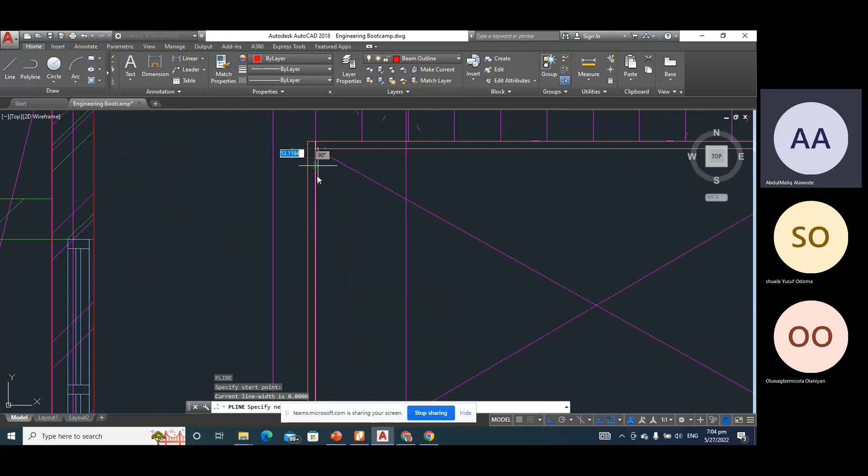So now let's try and take off the void the architect said he wants. What the architect says is, okay, this place, I don't want anything. I want people from up to be seeing people down. That is what this guy is telling us here. And it's not a problem. We are going to do it. So you're taking that off. Okay. Nope, not like that. The whole of this place will be a general void.

Now let's study our staircase. It's important we study our staircase to know where we are going to put our void. Where does the staircase stop on the first floor? What is this? Is this on the first floor? Yes, it's on the first floor. Let's check first floor. What is this? Is this really possible? Are you seeing what I'm saying? Yeah. Is this really possible?

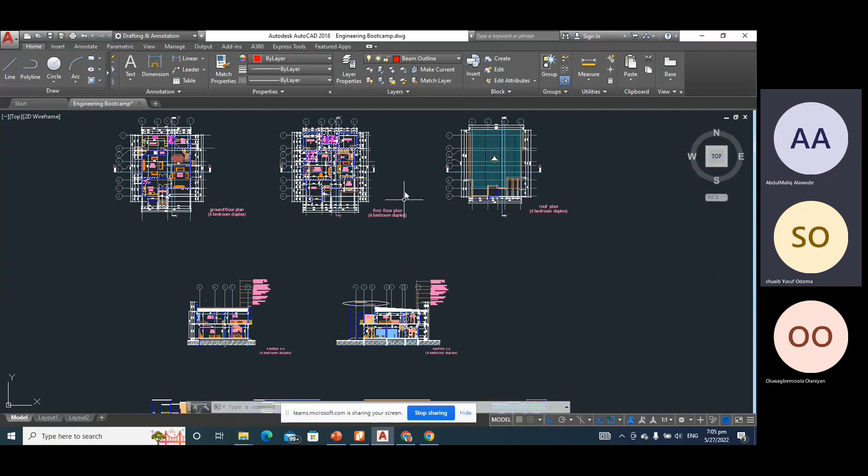Let's use the section to view. Thank you very much. That's what I want to hear. When we go to our section XX, we can actually read up from the section. Although there is no section that goes through it, most of the sections are facing it. So section XX, let's see. XX is this. XX is telling us that that long side is the one going up, and there is no wall that is hitting it. Okay. You understand?

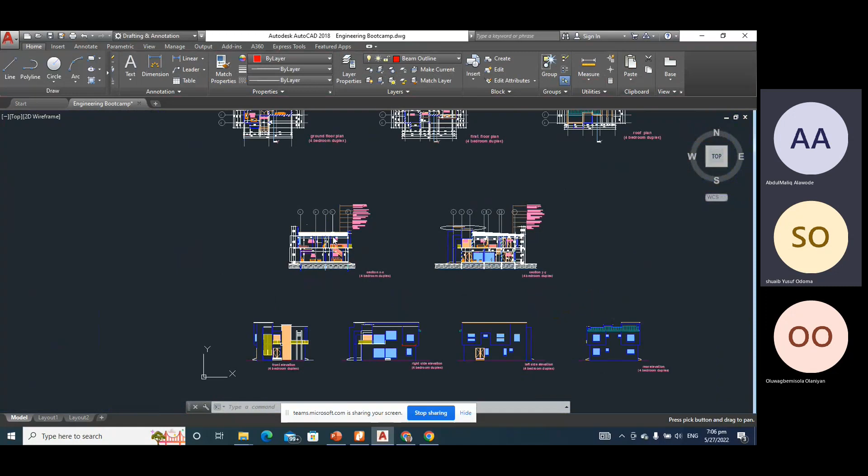So that means this is an architectural error, probably an export error from the architect. Why export? Because you can't have a wall that will shoot into your staircase. In fact, from the section, there is nothing like that. You understand my point? The staircase moves on its own, and this is on the ground floor. This is the one that is leading directly, that is hitting the first floor slab. And the last step is flush with the block wall of this bedroom. You understand my point?

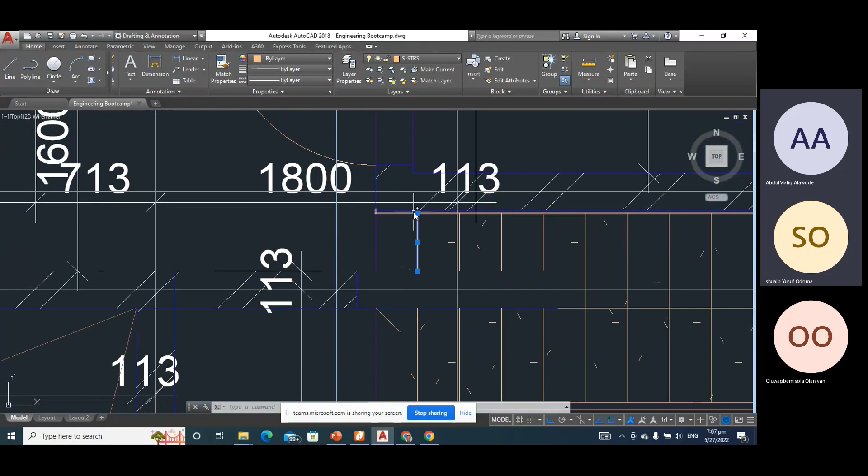So I can actually introduce a beam, and that beam is going to serve a lot of purposes. So this is where we are talking about. So this staircase actually did not reach this place. Abi, let's see, let's pick.

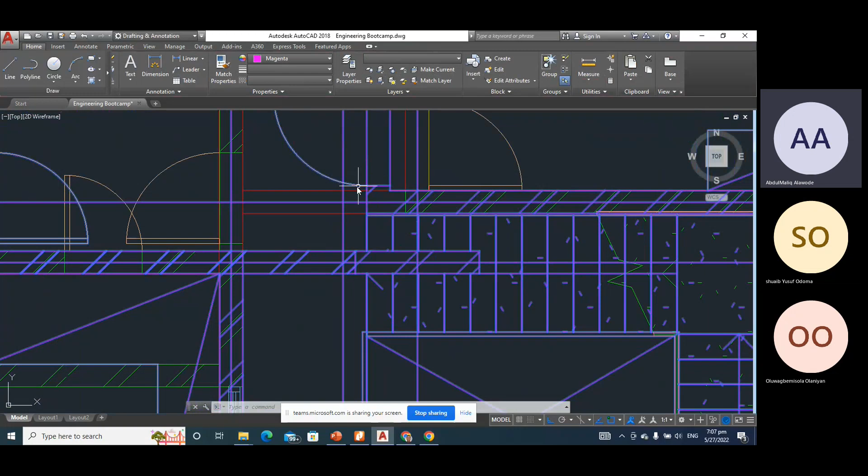Okay. We have, this is where, what they call it. So we can actually introduce a beam. The beam will start here, go all the way. I'll just leave it tentatively here because I know later we are going to have a beam that is going to reduce this span. You understand my point? So we take an offset, 225, 250. I said 230 rather. 230. I've taken the offset already.

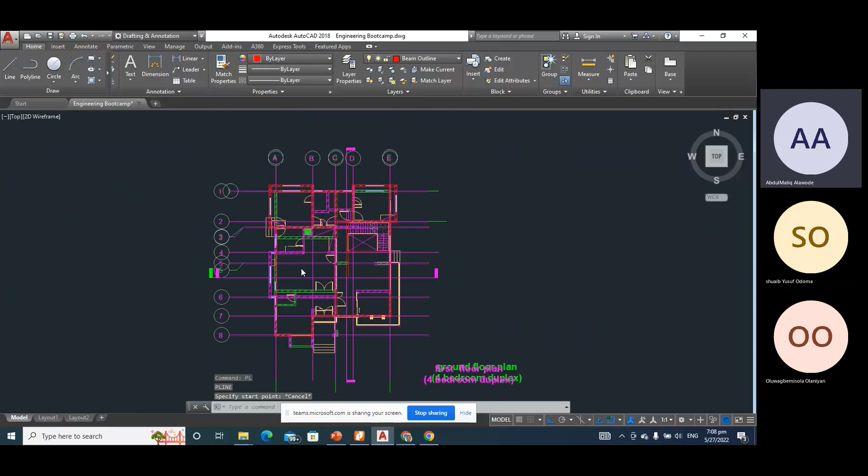Now let's see the ground floor. Which other wall can we utilize? Okay, a very good wall is there. You can actually utilize this wall. So let's pick. Why is this so open like this? You go to your ground floor, you check. Oh, it's a private lounge. And the private lounge is next to the dining room. So this is like a porch. So it's not a problem. We can easily pass our beam on it.

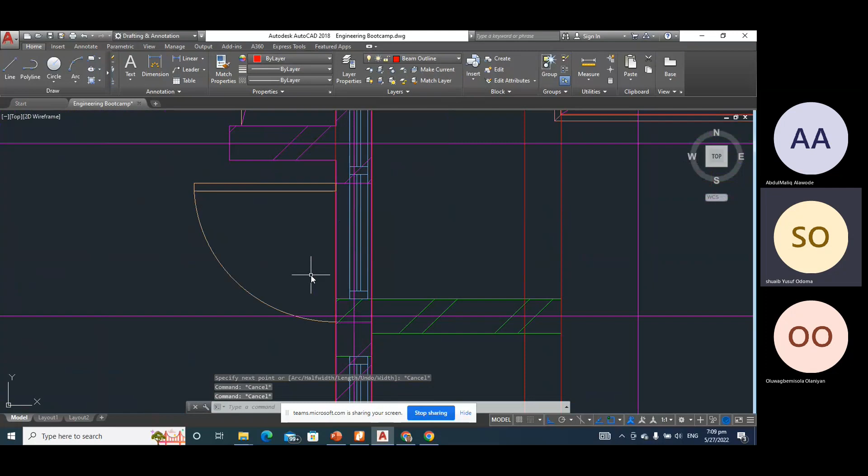They can even do like a porch design here. You understand my point? And put probably a curtain or something, whatsoever they want here, depending on the choice of the interior designer. Let's take a beam. Okay. 115. What's that? I have 1 more minute. After drawing this beam, we'll call it a day. And I stop it here. I take an offset. 30.

Okay, then. So now, before we go, take a look at this junction. Which one do you think will be primary? Which one will be secondary? Is it the horizontal that will be primary or the vertical? The horizontal is longer. The horizontal is longer? Okay, so it's going to be the primary, right? You mean this one, right? Yes, you are right. It might be longer, but you now look at the support system. This last explanation, I'm sorry, is already 10.

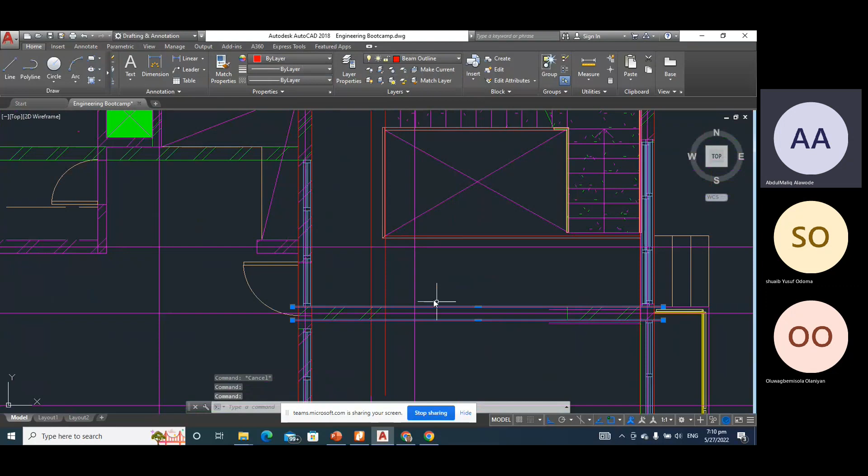If we are taking this guy as the secondary beam, what does that mean? What's the implication on this beam? That means this beam will be a cantilever, which is analytically unstable. So in that regard, we are going to make this horizontal beam the primary, while the vertical will be the secondary. Do you understand? So I will stop from there. By next class, we are going to continue here.